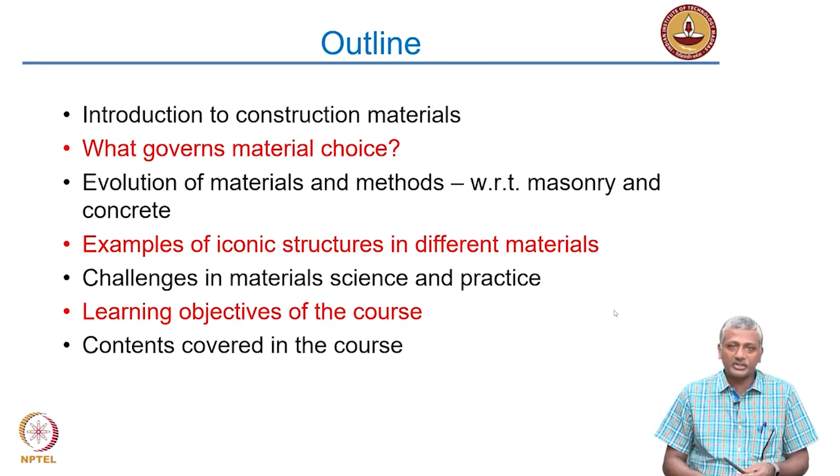Alright, so let's begin with what are construction materials. Obviously, these are materials used for construction and these cover a range of materials starting from steel, concrete and asphalt, wood, polymers and plastics. There are other metals that are used in construction and composites. Please note here that I have not included soil. Truly speaking, soil is also a construction material, but then we deal with soil entirely as a subject in geotechnical engineering. So, I am not really touching upon that particularly here.

And one of the aspects that we will focus strongly on in this course is the coverage will focus mainly on steel, cement concrete and bituminous concrete or asphalt concrete. So, that is what will be the primary focus. We will also talk about the other aspects of other construction materials too.

Now, of course, amongst these materials, it turns out today that concrete is the most widely used construction material of all, if you do not consider soil as one of these materials, because truly speaking, the quantities of soil that we use for construction are probably exceeding anything else that we ever use. So, concrete is the second most consumed material in the world, and I do not know if you know which is the first most consumed material in the world. I'll leave that to you to guess for a minute or so.

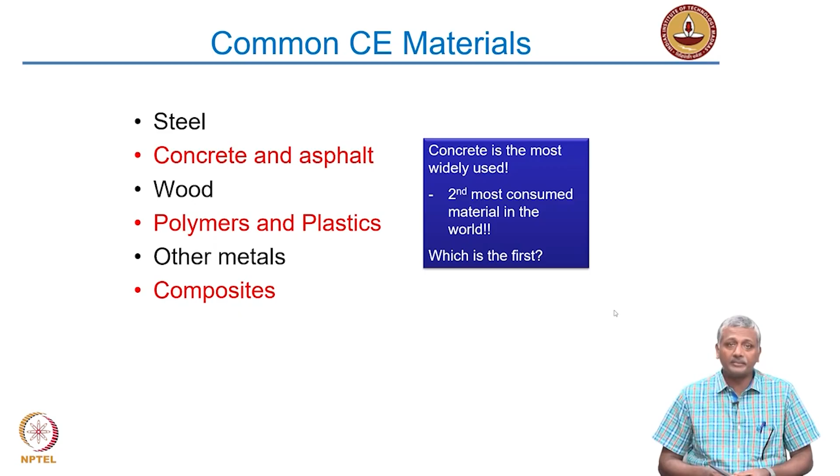Okay, if you have not found the answer, it's essentially water. Because water is critical to our life on this planet Earth, and we consume the maximum quantity of water. Water is the material that is consumed in maximum quantities in this world. But second to that is concrete. Can you imagine the impact that concrete will have on our day-to-day lives and on our environment? And that's something we'll also talk about towards the end of this chapter.

Right. Now, why do we want to study materials? Because people have been using construction materials for ages now, and buildings have withstood the test of time. Some buildings have stood for 1,000 years, some for 100 years, some for 10 years and so on and so forth. So, there is obviously a difference in the longevity of buildings. So, what we want to do by studying materials is that we want to improve the quality of the existing materials, which will impact the performance and service life of a structure.

So, the concepts of service life may be different depending upon the type of structures that we are talking about. If you are talking about a home, you want the home to be available for you until you pass away, right? So, most typical human beings, or at least the average family in India, would tend to build their own house when the husband and wife are probably in their 40s or so.

So, you build your house or you buy a house in your 40s. So, you want the house to be good at least for 30-35 years, that is until your lifetime, right? But then when you are going to build a bridge across a river, this bridge basically connects two parts of the country together, and it's forming a very important and integral part of the infrastructure of the country. In such cases, you might think of actually designing the structure to last for 100, 150 years.

If you are building monuments like temples, like our forefathers did, they built several temples across the country, and these temples have stood for 1,000, 2,000 years in some cases. So that's the impact that the structure and the importance of it has on the overall service life.

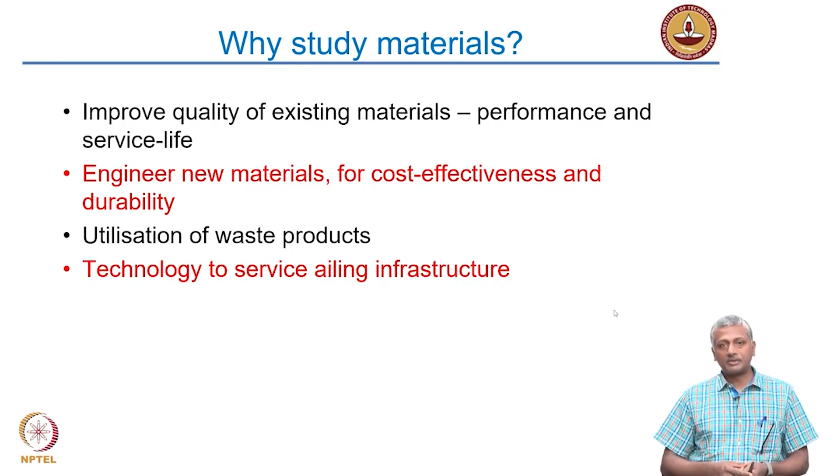So this course forms the most basic one, and for a good reason, because essentially materials are at the background of all your understanding of structural behavior. So what are the factors that govern the choice of a material? If you are in a particular location, what would you think about before choosing a particular type of construction material for your house, for instance, right? Of course, it depends on the type of application.

In some cases, even though one material may appear a lot more cost effective as compared to another, I would think about using the other material because of the type of application. For example, if I have to put up a petrol bunk in a matter of, let's say, a few days, I cannot rely on concrete or masonry because it will take a long time for the structure to gain strength and start being used. So I'll go ahead and make it with steel. Steel construction is much faster, so I can actually execute the structure much faster, right?

The cost effectiveness obviously is important because, given a range of materials to choose from, one of the factors that will affect your choice will obviously be the cost effectiveness. How inexpensive is the material to use, and at the same time, for a given cost, what is the performance it can give me? So that's what the approach should be. Rather than looking at the initial cost of the materials, look at, for a given cost, how much performance can I expect from this material? Very important, obviously, availability, extremely important, right?

Because the material has to be locally available, otherwise you need to transport it over long distances, and that is not really a good thing to do, because if you are transporting material from long distances, it incurs a big cost, not just in terms of money, but also in terms of the environmental pollution, because vehicles are transporting this material from very far off distances, and they are consuming petrol and emitting, right? So all these are ancillary to your choice of materials from a far off location.

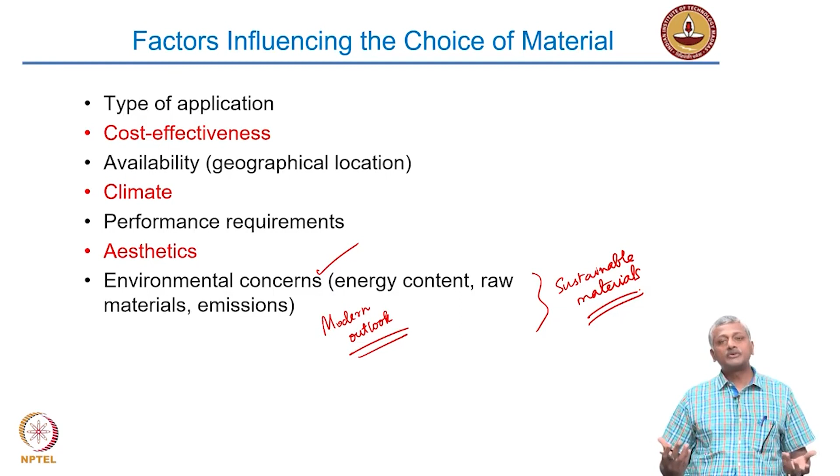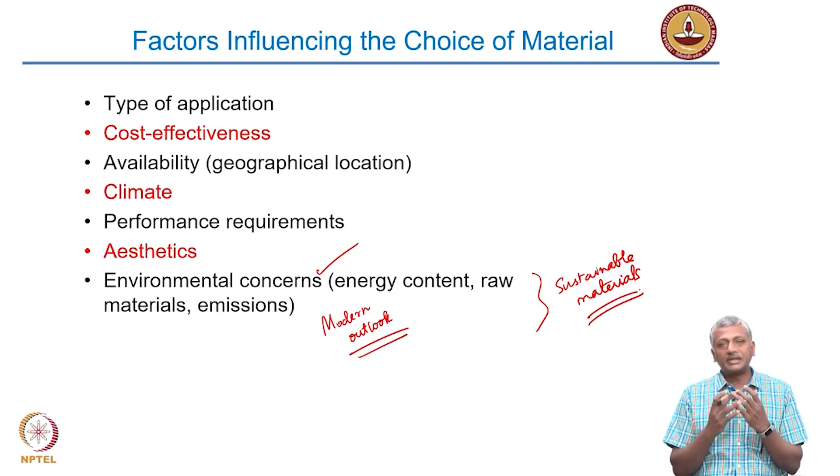So this is the impact of study of materials, that you get to decide what is the best way forward in a given structure. Okay. Now, how did materials evolve, and essentially how did the construction methodology evolve? Both are actually connected. The choice of the material and the construction methodology often go hand in hand, and this is how the evolution actually occurred with respect to the use of materials.

Initially, of course, people were looking at monolithic construction, like the cave dwellers obviously carved out their dwellings inside large rocks. So those were monolithic structures. Even some of the shore temples that you see in Mahabalipuram are monolithic, they have been carved out of a single rock. So there is no question of instability there, things are quite stable because the rock itself or the monolith has a very large mass. So sheer mass basically leads to stability there.

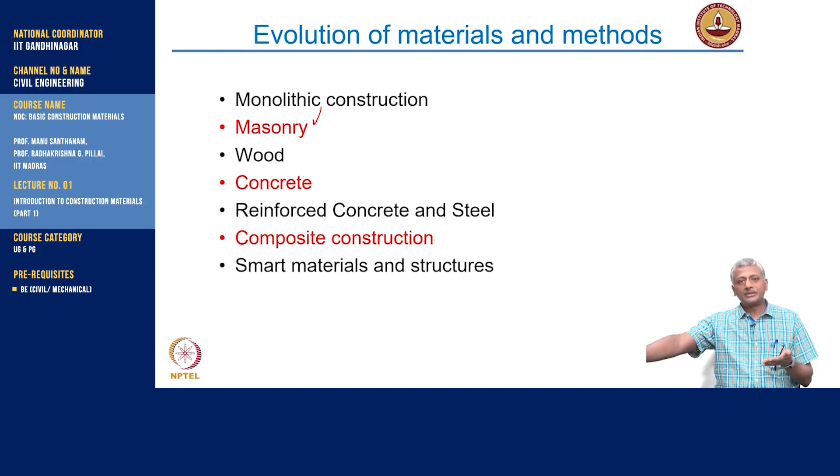Then from monolithic construction, we started moving towards masonry. And masonry essentially is nothing but putting blocks or components together and connecting them with a binding agent. That is what is masonry. Okay. So, in the past obviously we started with stone masonry, and then brick evolved when people started understanding how to produce brick from clay, and then stone and brick basically took a large part of the building history that we have recorded over the last maybe 5,000 years, right. Stone and brick probably form the maximum used materials.

In the last 200 to 300 years, we have started moving more towards concrete. Of course, in between I have left out wood. Wood has been an important construction material right from the start. Obviously, prehistoric man that lived in caves could also have easily built up a house out of wood once they understood that wood had a very good strength on its own, and wood was obviously an integral component of the day-to-day lives of prehistoric men.

From concrete, we moved on to reinforced concrete and steel, essentially looking at how to combine concrete and steel in the best possible manner to get a good composite action. That is the basis of reinforced concrete. And then of course, we also started using steel buildings. We also started doing construction with steel itself. In the modern era, we have moved towards composite construction, where we maximize the benefit out of the combination of two dissimilar type of materials.

And then of course, today we are also talking about smart materials and structures that respond to their environment and end up leading to a low energy, low CO2 emission strategy. Okay. So, choose materials wisely, choose them in such a way as to lower the energy requirement for operational and maintenance costs of the buildings also.

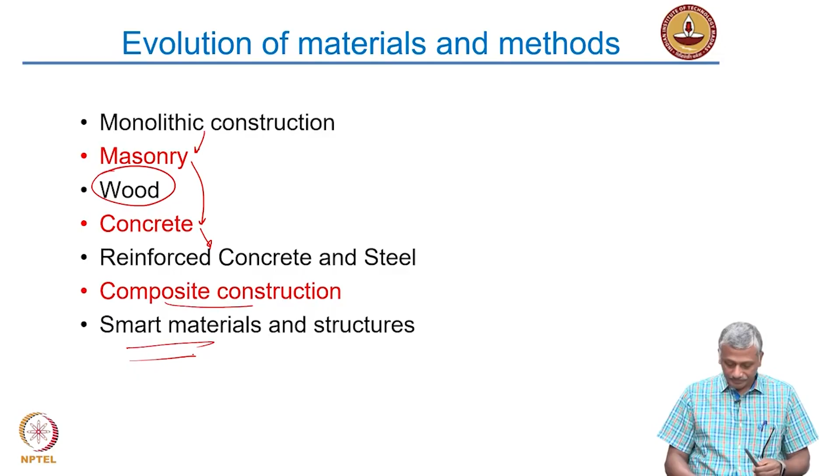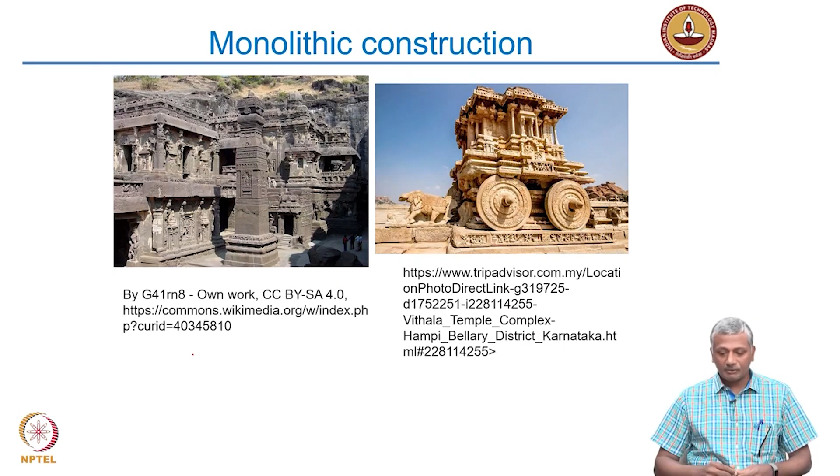Monolithic constructions, of course, in India there are a lot of examples. There are several different temples and forts which have been carved out of single stone. And then you have masonry. In the past, when people did not think about using binders or binding agents between the blocks, they dry stacked the masonry.

Essentially, large blocks of stone were dry stacked on top of each other, like what you have in the pyramids. This is a pyramid, the Great Pyramids of Egypt. The Pyramids at Giza basically are dry stacked masonry. These were large blocks of stone that were kept on top of each other, and the shape basically ensured that there was stability and the rocks would not fall.

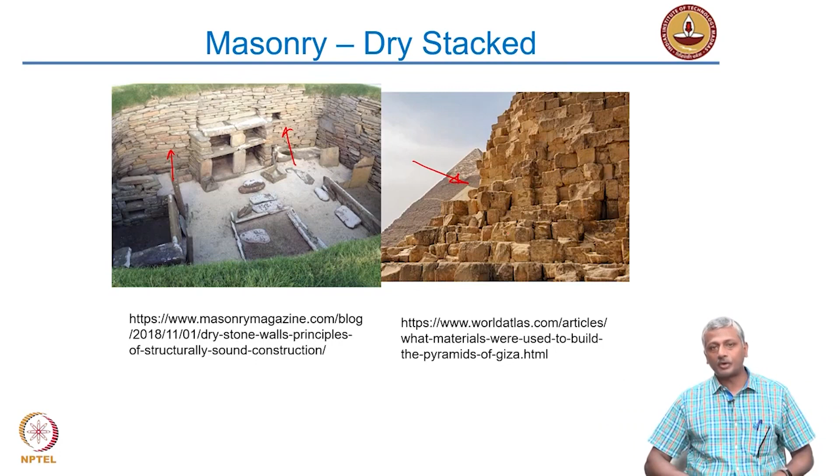Later, people started realizing that you have to be superhuman to really lift these large blocks together, or you had to waste a lot of human effort in trying to get these blocks together. So, people started moving towards masonry, and in masonry you have the advantage of using smaller blocks of stone or brick and connecting them with a binding agent, like you have here mortar, which is connecting the bricks together. Here you have stone blocks that have been connected again with mortar joints.

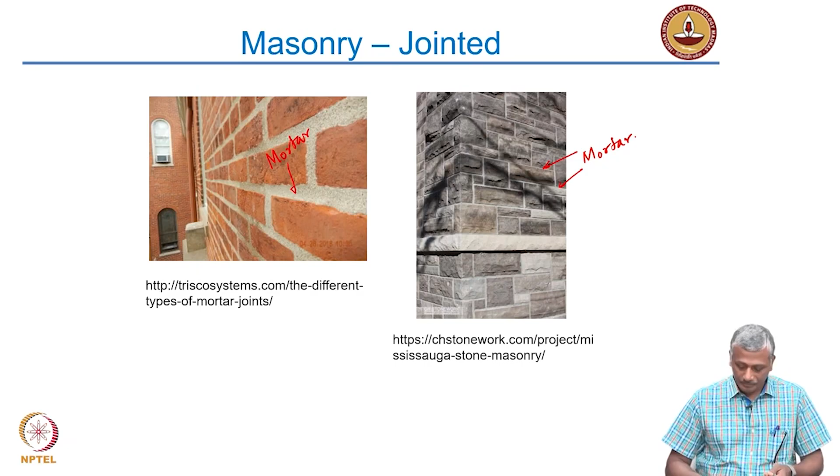So, brick and stone masonry led to the use of smaller blocks of bricks and stones, which were easy to put together. Workmen could handle them easily on the site, and productivity improved significantly. People then started getting a lot more inventive with respect to masonry and thought, can we go back to the days where mortar was not used? In most cases, with masonry blocks jointed by mortar, the time it takes for the wall construction depends on the time that it takes for the mortar to harden and start binding the blocks properly.

So, what if we totally avoid the mortar by providing interlocking joints? These blocks basically fit into each other, and they do not need any mortar to hold them together in place. This is more like the Lego or building blocks that you played with as kids. So, this is essentially

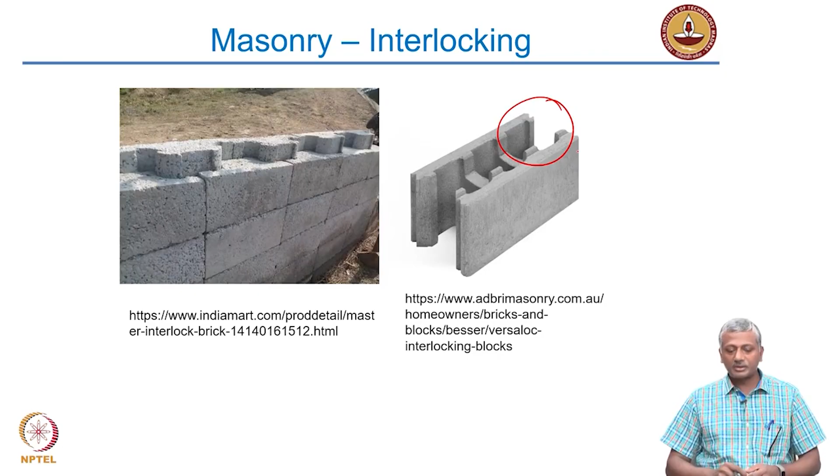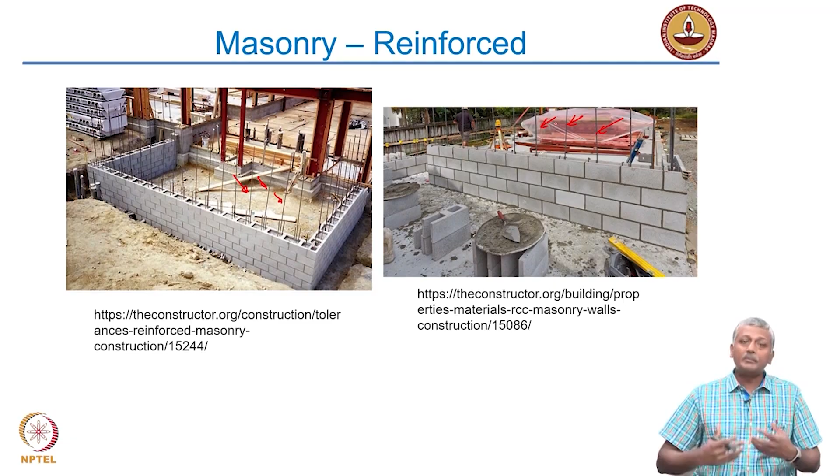interlocking block masonry. Later, people realized you could produce masonry with concrete, and that led to the formation of hollow concrete units. The cavities inside concrete blocks were later reinforced with steel, so that now you could get a composite action out of the masonry wall, not just the compression load that it will take in plane, but also resistance to lateral forces because of the steel. So, we started utilizing materials and combinations of materials in such a way that they gave the maximum benefit.

Now, on the one side, masonry was getting developed and people were getting innovative with the use of masonry. On the other side, the binding materials also were getting developed. In the old masonry and brickwork, bricks and alabaster were cemented using bitumen in a lot of the old structures by the Babylonians and Assyrians. Bitumen, also called asphalt, is found in some naturally occurring pools around the world. This bitumen is very sticky and it can make a very good glue. So, bitumen was the binding agent in many of the old structures.

Then of course, burnt gypsum based cementing material was used in Egypt. When you burn or heat gypsum beyond 100 degrees Celsius, it converts to hemihydrate and then to anhydrite. Hemihydrate is commonly known as plaster of Paris. When you mix water back with anhydrite or hemihydrate, it converts back to gypsum and starts gaining some strength. So, in massive masonry in Egypt, there is some evidence of the use of burnt gypsum based binding materials.

So, from bitumen, people came to gypsum, and then in the Greek period, there was the first use of lime mortar. Lime mortar employs lime as a binding agent. Lime is basically calcium oxide. It reacts with water to form calcium hydroxide, and that causes the mortar to set. Then it hardens by transforming to calcium carbonate. A lot of structures from the Greek and Roman periods were built with lime based materials, and some of these structures are still performing satisfactorily.

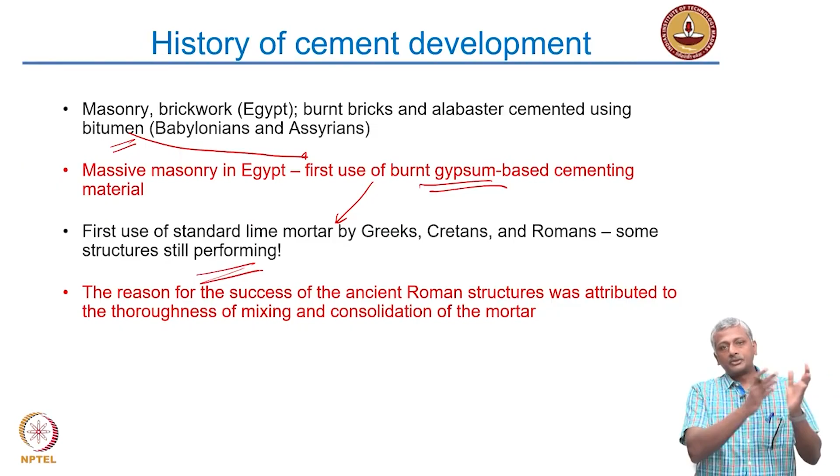From bitumen to gypsum to lime, and finally from lime we got to cement. Of course, before we got to cement, people started experimenting with lime and adding all kinds of additives to improve the quality of the lime, or to improve the quality of the mortar they get from mixing lime and sand. One of these was surki, which is basically ground brick mixed with lime.

Greeks used volcanic ash, basically volcanic tuff crushed to a powder, that was used for mixing with the lime. Romans also used volcanic ash. The first use was historically recorded in a place near Pozzuoli in Italy. This was the ash that came out from the eruption of Mount Vesuvius. Because it was found in Pozzuoli, it started to be known as pozzolana. Even today the term pozzolana is quite well in use.

When we talk about alternative cements in the market, you will see that there is something called Portland pozzolana cement. That means it has regular cement and it has an additive which is a pozzolanic material. We will learn about this when we get to the chapter on cement and concrete. Now again, there are a lot of examples of all kinds of additives that have been used inside lime mortars to improve its characteristics. A lot of these examples are from India also.

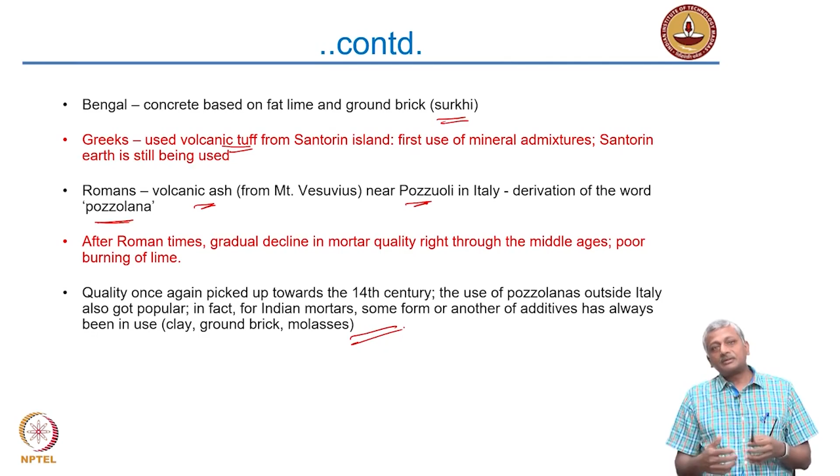But truly speaking, the modern era really started with the advent of cement as a binding material. There were a lot of scientists who did work with cement. First and foremost was L.J. Vicat. He said, I am going to try this formulation out, I am going to mix limestone and clay together and burn it. To produce lime, they just simply burn limestone. Then people started realizing, if the limestone is not very pure and I burn it, it seems to be giving some very interesting properties in the mortar. What if we take limestone and clay, add the impurity first and then burn it together? And that ended up producing cement-like substances.

Later, a very talented and possibly business-minded Englishman named Joseph Aspdin patented this technology of burning limestone and clay together and said that the product that came out will be called Portland cement. He got a patent on it. Since then, cement which we use for construction today is called Portland cement. The patent was obtained in 1824, but we still talk about it as Portland cement. That's the power of the name. The patent is no longer valid, but we still call it Portland.

Now, modern cement obviously is produced in sophisticated plants. We get a material that is free of variation and can perform very well in different kinds of environments. That is the impact of modern technology that has converted this material that was previously made by people who were not engineers, who were not scientists. But today it is properly engineered, properly manufactured just like any other commodity product. And we have not stopped at cement, we have gone to the use of mineral and chemical additives that enhance concrete properties. All these aspects you will learn a lot more when we get on with the course contents.

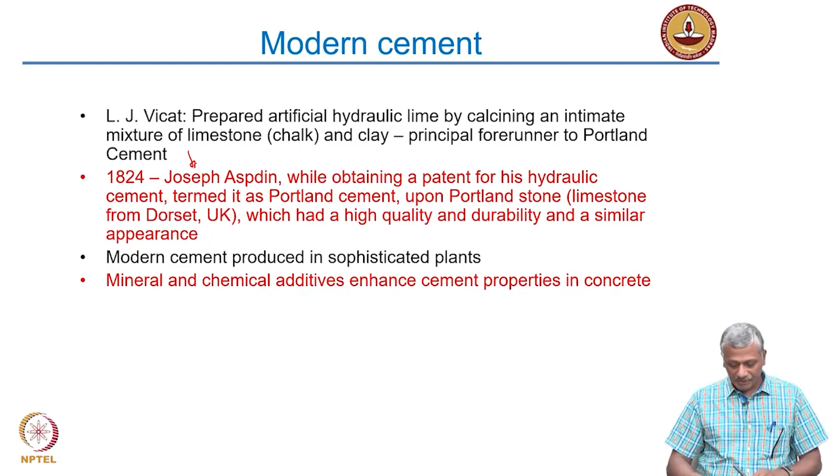So, needless to say, concrete has become the material of choice for the 20th century, primarily because it is highly adaptable. It can be shaped into any kind of shape that you really want. It is cost effective because the only costly component in concrete is actually the cement. The aggregate is not very expensive. Water is easily available, so it is not really a problem. And if concrete is designed properly, it will be durable and long lasting for a very, very long time.

So, these are the hallmarks of concrete, and adaptability makes it a material of choice much over stone. You can't really do the same adaptation with stone. You can't make stone into different shapes. It will take a lot of time and effort by workmen and artisans. We don't have that kind of time today in construction. For today's fast paced construction, concrete is probably the most suitable material.